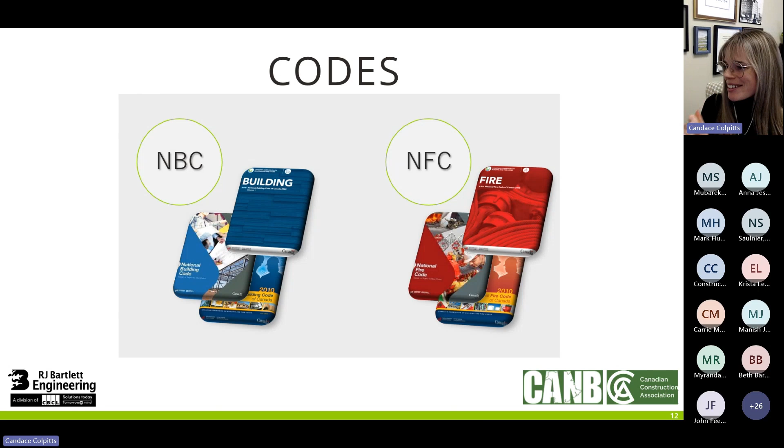Okay, so the NBC, National Building Code of Canada, that's mainly what I'll be focusing on today. If for some reason I get through the slides super quick, I'll be able to talk about some fire code stuff, but in general I'll stick to the building code. As for the evolution of the code, it's available in both English and French. It's adopted by each province in their own way. Some make amendments - New Brunswick we're just going to be adopting the 2020 with some amendments as well, specifically to accessibility stuff. The 2020 version, the most recent version that just came out a couple of years ago, is the 15th edition, where the NFC is the 11th edition. As a general rule, it cycles every 5 years.

Now the CCBFC, which is the Canadian Commission of Building and Fire Codes, who oversaw all these changes, is now called the Canadian Board for Harmonized Construction Codes, and is now overlooking these changes, keeping in mind that we want to harmonize with all the provinces across Canada. For public reviews, anybody can submit proposed changes for codes, and they're generally reviewed in the fall, and the standards that are developed as well can take that into consideration.

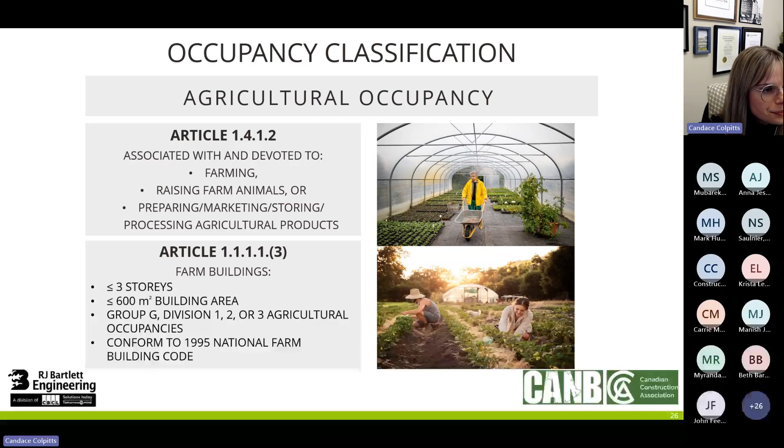Group G Division 1 is high hazard - things like feed mills, grain elevators, anywhere storing flammable and compressed gases and liquids, that would be high hazard agricultural. Group G Division 2, similar to your A2, is kind of your general category - anything that doesn't fit in the other categories, like animal exercise and training facilities, and packaging and processing of agriculture products and whatever's listed there.

Group G Division 3 is an agricultural occupancy where plants are grown in a building or part thereof that is primarily constructed of roofs and walls designed to transmit light - so greenhouses. And finally, Group G Division 4 are your farm buildings not intended for human occupancy - so grain bins, silos, and biomass facilities where people are only in there periodically for maintenance and not meant to be in there generally.

So if you meet those requirements, you can fall into Part 2 of Division B of the 2020 NBC. In general, the scope considers fire, structural, heating, and venting requirements of farm buildings. It covers the processes and operations carried out in the facility, and covers any risk of explosion or high flammability in those conditions.

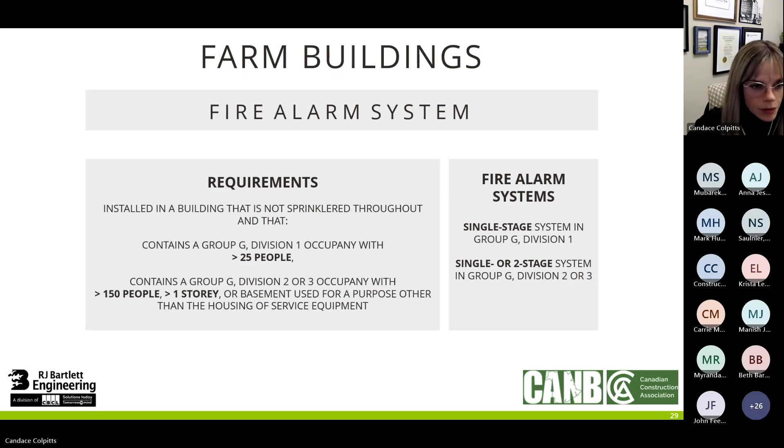So for fire alarm systems, if you have a high hazard agriculture occupancy with over 25 people, you need to have a fire alarm system, and this is if you're not sprinklered. Also, if you're a Group G Division 2 or 3 that has over 150 people, over 1 story, or has a basement for anything else other than service equipment, then you would need a fire alarm system. But if you're sprinklered, you need a fire alarm system anyway - this is for unsprinklered facilities. So in your high hazard, you would need a single stage fire alarm, and then a single or 2-stage for the other.

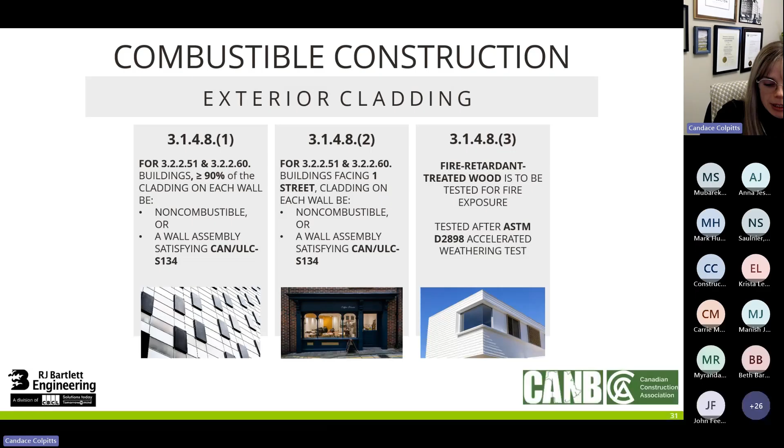Okay, so we're going to get into some general requirements. In combustible construction, there's been some changes to the exterior cladding requirements, and the main one is in sentence 3.1.4.8.2. So there is now, if you have buildings that meet 3.2.2.51 or 60, which is your Group C residential and Group D office buildings up to 6 stories combustible, and it's only facing one street, the cladding on each wall needs to be either non-combustible or a wall assembly meeting CAN ULC S134. So this has been clarified in the code in a couple of instances.

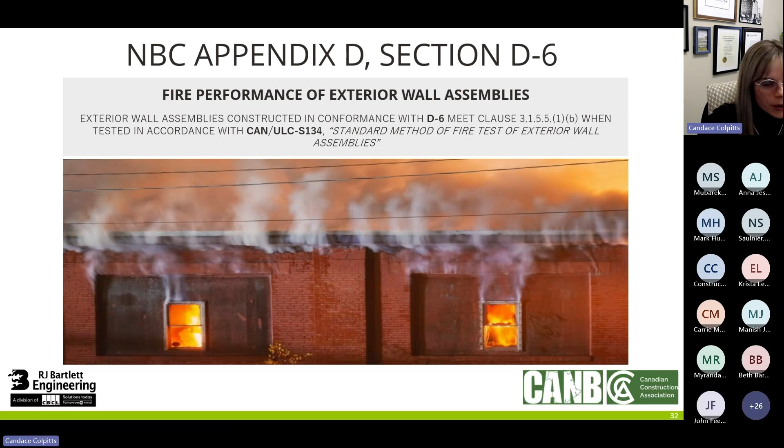Additionally, for that exterior cladding, you can meet Appendix D6, and if you meet that, then you would satisfy that requirement of being tested in accordance with CAN ULC S134. This hasn't changed, but we're just bringing this up again as a refresher. So here's your table D6.1.1 as for a couple of examples as to what assemblies could meet that requirement for your exterior wall.

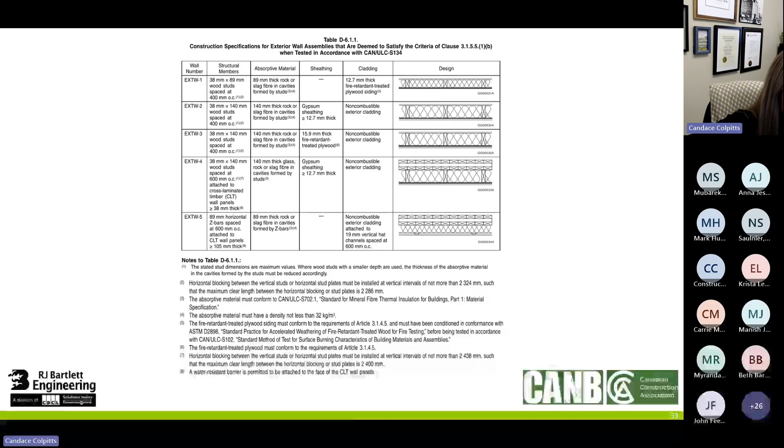Moving on to non-combustible construction, there is now a new element that is exempt as a minor combustible component. So wood blocking that's used for attaching windows in an exterior wall, that is now exempt. So you can have that in a non-combustible building even if it's combustible.

Another exciting change to the 2020 code - in non-combustible construction, you weren't really permitted to have a curtain wall. Each window had to be an individual unit separated with non-combustible construction. You had to have at least a meter of non-combustible construction separating each story, and you were limited to 40% of the aggregate exterior openings in each fire compartment. That hasn't been changed since 1965, so it was about time to change it. Now you're allowed to have combustible window sashes and frames in non-combustible construction, provided that they're non-contiguous between stories, so that they don't have direct contact. I don't believe there's an actual distance measurement - you don't need that 1 meter in between each story.

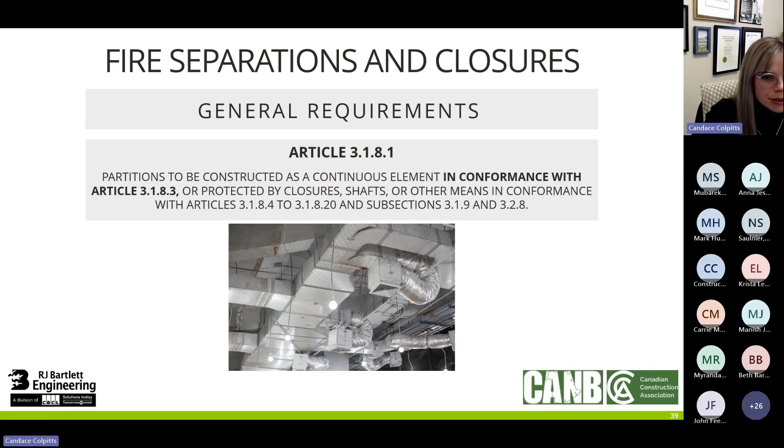Okay, moving on to fire separations. There has been some clarifications added for the requirements of fire separation continuity and fire stopping certain penetrations, and this also provides some consistency between Parts 3 and 9. I guess to note is in the 2015, the last version of the code, a lot of the requirements required you to have smoke tight joints, whereas now a lot of joints need to be fire stopped.

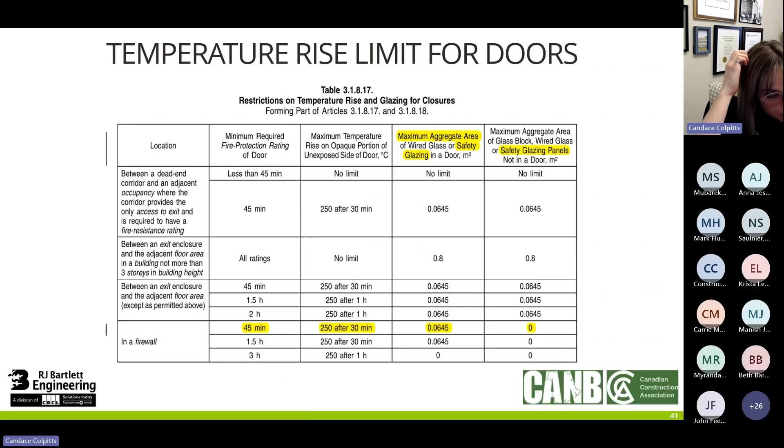So more on fire stopping, some additions. There's now restrictions as to what can be cast in place - only steel, ferrous, copper, concrete, or masonry penetrations can be cast in place. And also there's additions where the T rating, so when you have your fire stop that needs an FT rating, the T rating can be dropped for service equipment penetrations through a horizontal fire separation where they're contained within the fire separation. That's what sentences 6 and 7 of Article 3.1.9.1 are describing.

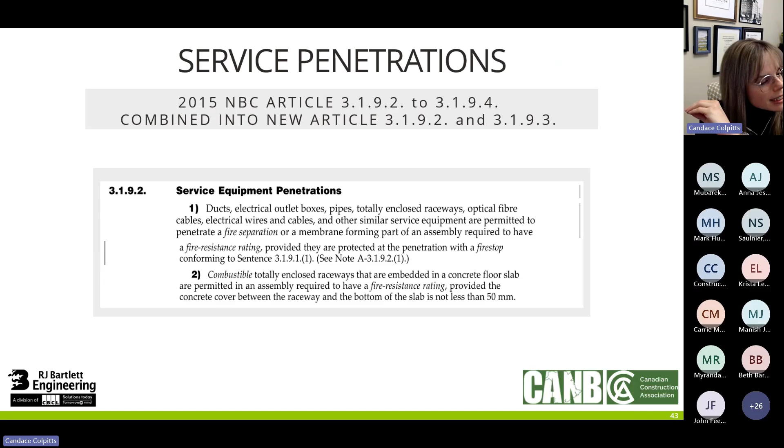So some other additions here - the service equipment, basically you need to fire stop instead of it needing to be incorporated at the time of testing. That wording's been changed. And there's been some additions for the permissions of combustible outlet boxes and some fire stopping as well.

In the 2015 code, combustible drain, waste, and vent piping needed to be fire stopped with an F rating and a 50 Pascal pressure differential. Now in the 2020 code, the 50 Pascal pressure differential only applies to 3+ stories, as seen in clause B.

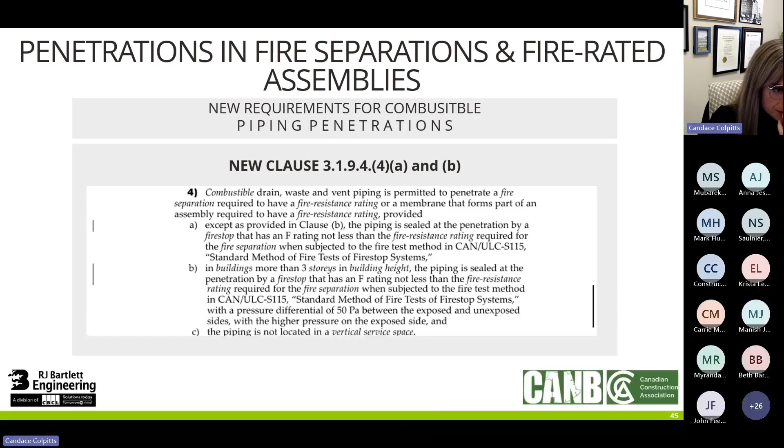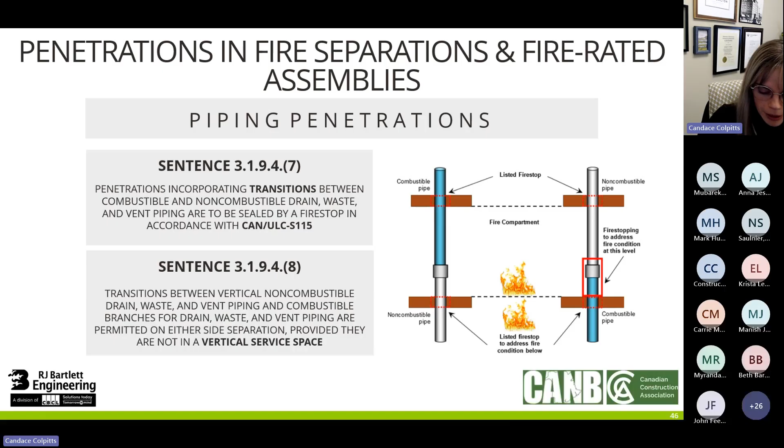Another addition is some added requirements for the transitions between combustible and non-combustible piping for drain, waste, and vent pipes. Your F rating for those fire stops needs to be not less than the fire resistance rating of the separation being penetrated.

Another addition to Part 3, similar to Part 9: before, if you had a room with combustible material like trash and recycling, you needed a 1-hour fire separation. Now in 2020, you're permitted to go down to 45 minutes if the floors can be 45 minutes in your building.

One of the more exciting additions to the 2020 NBC is encapsulated mass timber construction, EMTC. Research on this construction type has shown that when you encapsulate mass timber, it can perform the same as non-combustible in a lot of ways. This is used a lot in Europe and is successful there. We encapsulate the timber with a 50-minute encapsulation rating, and there are some permissions for what can be exposed.

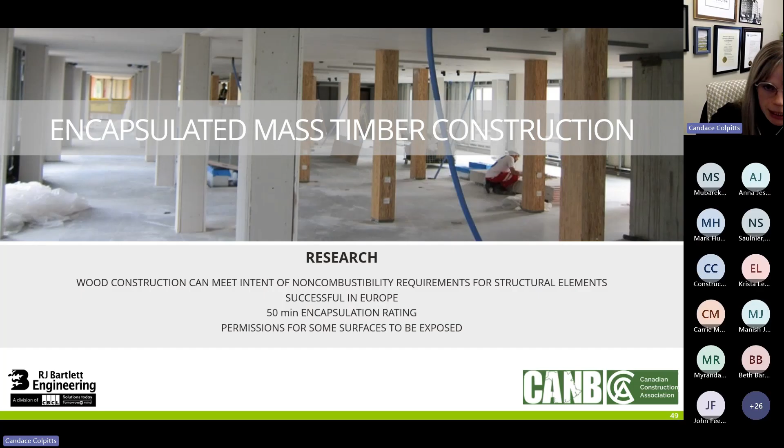So EMTC would include your beams, columns, arches, walls, floors, and roof assemblies. They need to be heavy solid mass. You're not permitted to have concealed spaces unless permitted by 3.1.6.3.4, such as if it's sprinklered or filled with fiber insulation. You need smooth, flat surfaces, with no sharp projections or thin sections.

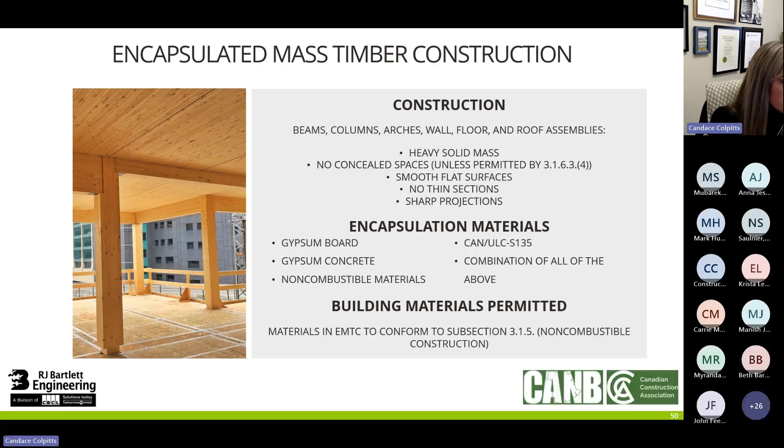Things used to encapsulate mass timber include gypsum board, gypsum concrete, non-combustible materials, or anything meeting CAN/ULC S135 - the standard test method for determination of combustibility parameters of building materials using oxygen consumption calorimeter or cone calorimeter, or a combination of the above. Building materials permitted in an EMTC building would be anything conforming to subsection 3.1.5, the same as for non-combustible construction.

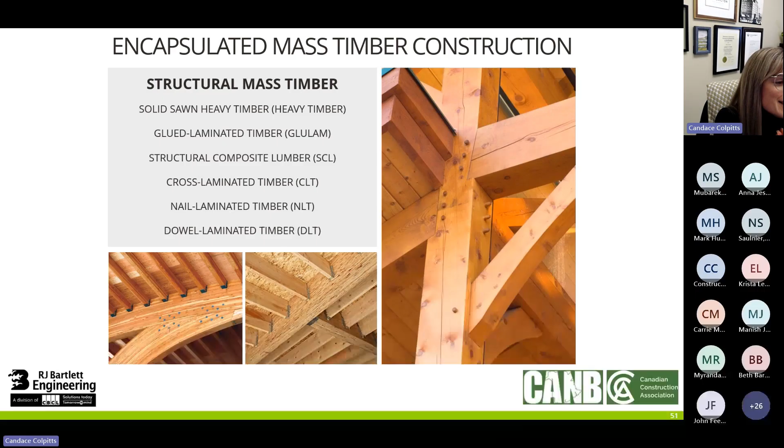Mass timber can include heavy timber, glulam, structural composite lumber, cross-laminated timber, nail laminated timber, and dowel laminated timber, to name a few.

Similar to your heavy timber requirements, there are certain dimensional requirements that you need to have for EMTC. Those are listed in 3.1.6.3.

Now for encapsulation ratings - some examples of what can achieve an encapsulation rating of 50 minutes: gypsum concrete that is at least 38 millimeters thick, or 2 layers of 1/2 inch type X gypsum, or anything in accordance with CAN/ULC S146.

You don't need a 50-minute encapsulation rating if less than 10% of the wall area within that suite or fire compartment has a flame spread rating of less than 150, provided exposed surfaces face the same direction. Also if less than 10% of your ceiling area within a suite has a flame spread rating of less than 150, or if less than 25% of your ceiling area with no mass timber walls has a flame spread rating of less than 75.

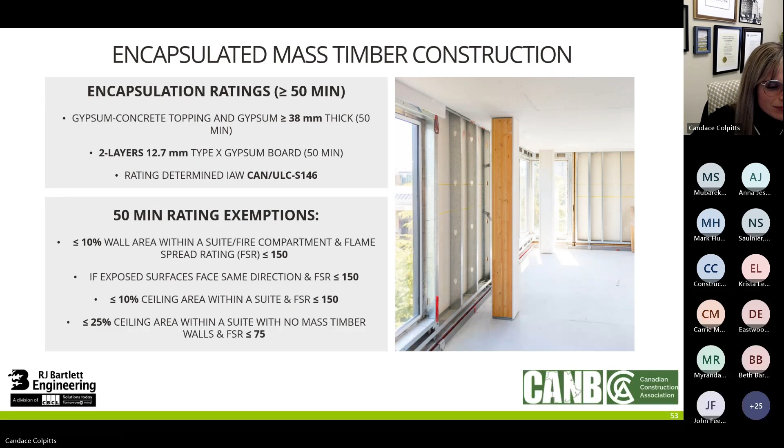More on EMTC: you're permitted to have combustible window sashes and frames if the windows are separated from other openings by non-combustible construction or EMTC. You have 1 meter of separation between stories, and the aggregate area of your openings is limited to 40%, similar to non-combustible construction beforehand. Unfortunately, no curtain walls yet.

When it comes to exterior cladding on an EMTC building, you need to be non-combustible, or you're permitted to be combustible in accordance with 3.1.6.9, which provides limits on aggregate area, separation between individual open portions, and flame spread rating limitations.

You're allowed up to 100% combustible cladding on the first story if it's within 15 meters of a fire department access route, or if CAN/ULC S134 mentioned in clause 3.1.5.5.1B is met. You can have up to 10% combustible cladding if 3.2.3.7 is met.

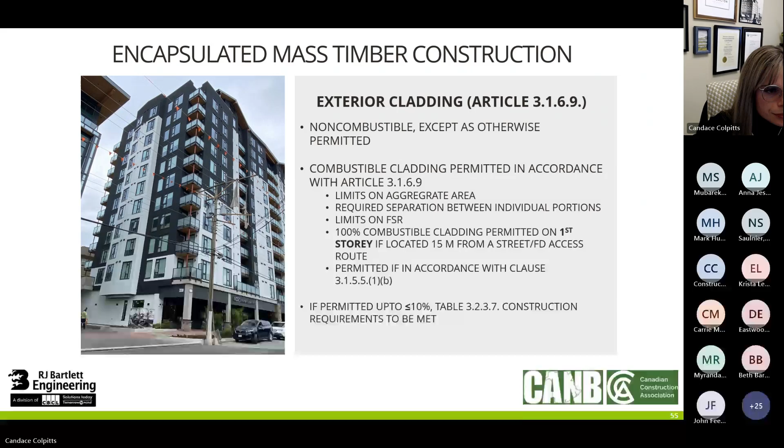Now for stairs - you're permitted to have combustible stairs in EMTC, even in exit stairwells, provided that the landings meet 3.1.6.3 and 3.1.6.4, which just provides some dimensional criteria. You can't have sharp edges or concealed spaces, and your exposed mass timber construction needs to be protected from adjacent spaces by gypsum, concrete, non-combustible construction, etc. You can also have combustible stairs permitted within a suite.

Now for interior finishes that are combustible: you're allowed up to 1 millimeter for walls and ceilings, or up to 25 millimeters on walls if your flame spread rating is less than 150. For ceilings, you can have up to 25 millimeters thick if your flame spread rating is less than 25, up to 10% of your ceiling if flame spread rating is less than 150, and up to 25 millimeters of fire retardant treated wood. Again, no foam plastics unless it's less than 1 millimeter thick.

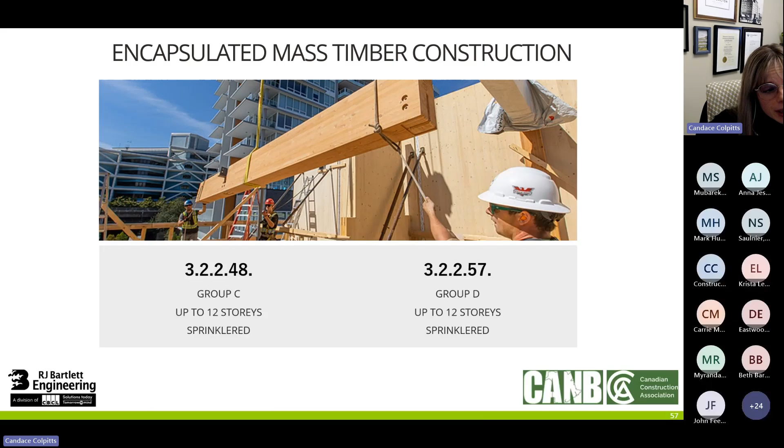Now there are 2 new construction articles that allow you to go up to 12 stories with EMTC, so that's pretty exciting, and I'll get into that in more detail in the next few slides.

For construction requirements, in the 2015 code, six-story combustible Group C and D buildings facing one street had to have at least 25% of their perimeter within 15 meters. Now you're permitted to have as low as 10% of your perimeter within 15 meters, provided the cladding conforms with 3.1.4.8.2, which basically means it needs to be non-combustible or meet CAN/ULC S134.

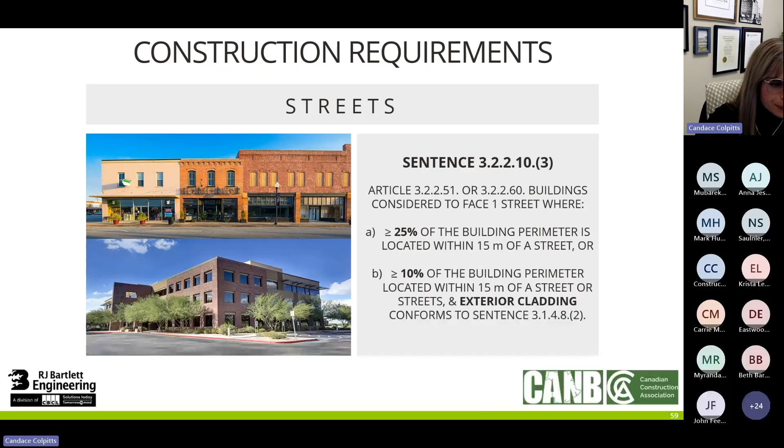Balconies on buildings in accordance with 3.2.2.48 and 57, which are your EMTC/non-combustible up to 12 stories, Group C or D, need to be either non-combustible or constructed in accordance with 3.1.6.3, which I believe covers the mass timber requirements.

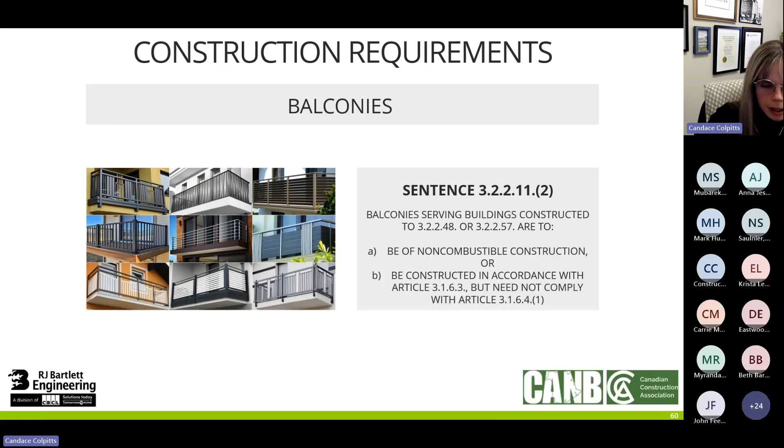Now there's some new mezzanine exemptions. The fire resistance rating of a mezzanine is now waived for gyms, pools, arenas, and rinks. In 2015, it only provided an exemption for roof ratings, but now it provides a mezzanine exemption.

Okay, so Article 3.2.2.48, this is your Group C building. It needs to be sprinklered. You can go up to 12 stories and up to 42 meters high, with EMTC or non-combustible construction. You're limited to a building area of 6,000 square meters. You need 2-hour floor assemblies and 1-hour mezzanines, and load-bearing walls, columns, arches, etc. need a fire resistance rating not less than that of the supported assembly.

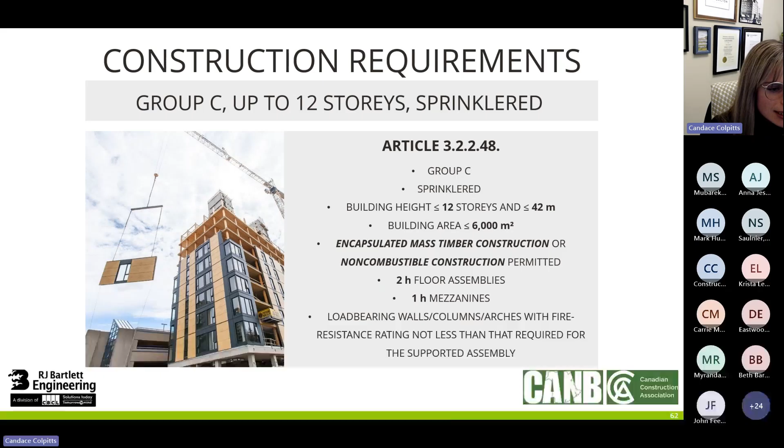Additionally, any floor assemblies within dwelling units that span more than 1 story need to be 1 hour, but they don't need to be constructed as fire separations.

You can have your Group A Division 2 or Group E mercantile occupancy, or storage garages, provided your assembly is located below the 4th story. Your mercantile can be located up to the 2nd story, and your storage garage up to the 4th story, so below the 5th story. That's what it says - it's interesting, I'll get into that a bit later, but the wording has changed a little. This is a new construction article, but there are other ones where the wording changed from 'up to the 4th story' to 'below the 5th story,' so it's just odd that they did that.

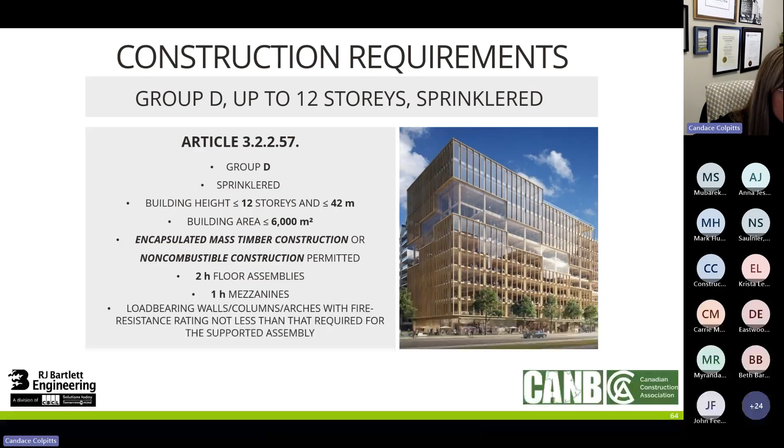Okay, so your next new construction article is 3.2.2.57, which is your Group D, up to 12 stories, sprinklered, up to 42 meters, up to 6,000 square meters in area, can be encapsulated mass timber or non-combustible, 2-hour floors, 1-hour mezzanine, and you can have assembly up to the 3rd story, mercantile up to the 2nd, and storage garages up to the 4th. Very similar to the Group C.

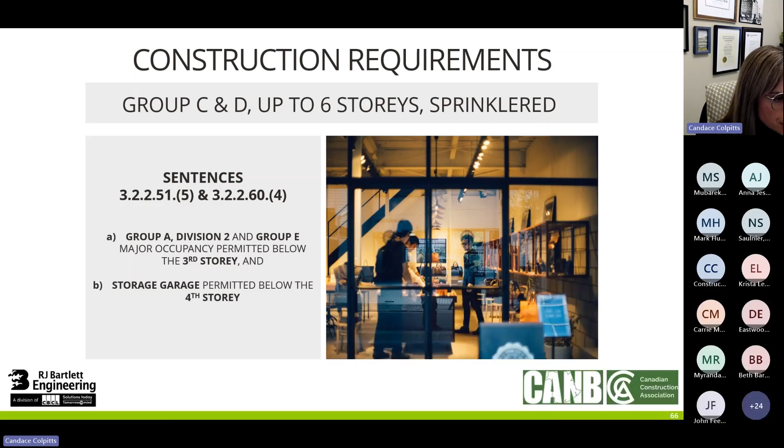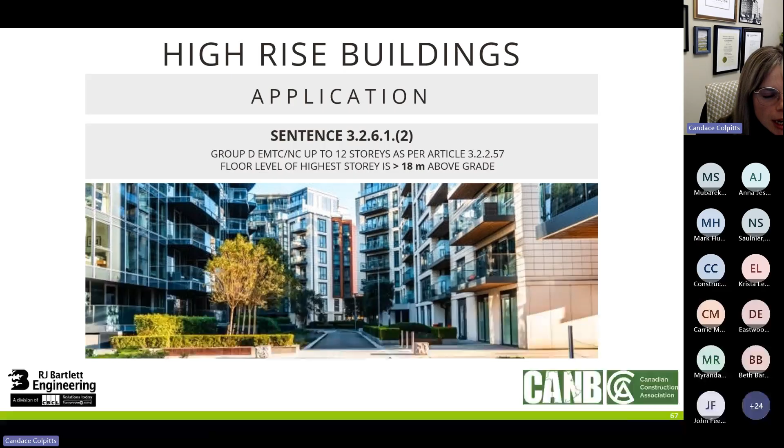Yeah, so this is where the wording was changed - these construction articles here for your Group C's and D's up to 6 stories, sprinklered. So Group A and E occupancy, Group A Division 2 and Group E occupancy, is permitted below the 3rd story, so up to the 2nd. And storage garages permitted up to the 3rd, below the 4th. It's noted that Group D occupancies that meet 3.2.2.57, that new construction article, are considered a high building if over 18 meters above grade.

Okay, now lastly for the construction stuff, when it comes to elevators, the 2015 code used to require electrical conductors to have 1-hour protection in accordance with CAN/ULC S101, but now you can have electrical conductors that conform to CAN/ULC S139 instead, provided your circuit integrity rating is at least an hour.

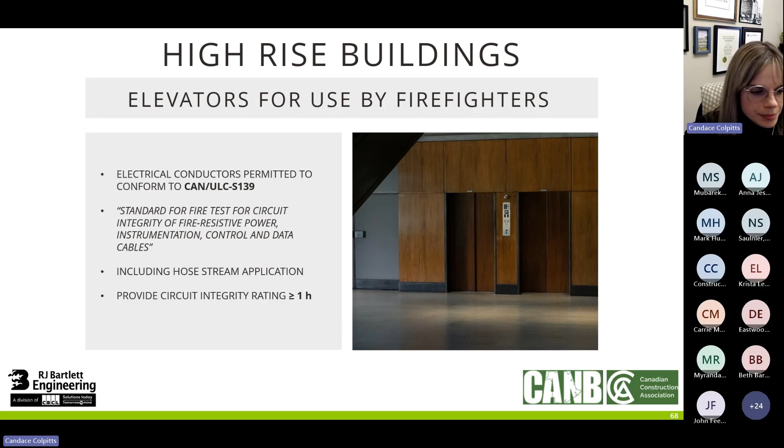Okay, now moving on to fire alarm and protection systems. Fire alarms are now not required in a residential occupancy that's not sprinklered if you have 4 suites or fewer that share a common means of egress, or if each suite has direct access to an exterior exit facility leading to grade.

So a new requirement that's been added to 2020 NBC is that heat tracing cables on standpipe risers and sprinkler lines now need electrical supervision and be transmitted to the fire department.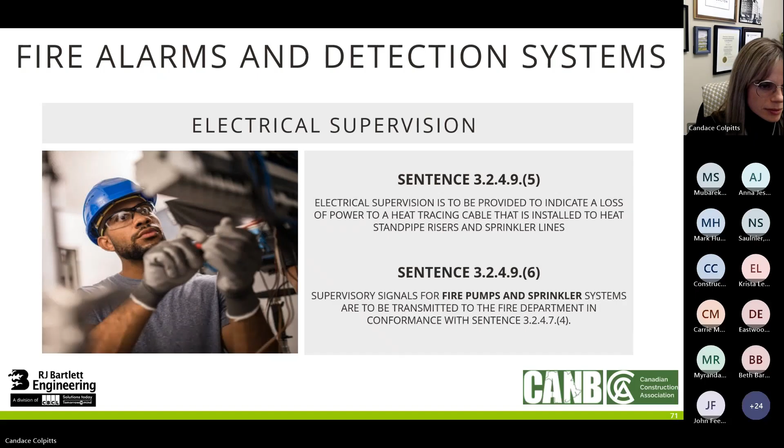Sentence 6 hasn't changed. Here's an interesting fact: research has shown that low frequency signals, between 470 and 570 hertz, are best at waking sleeping people. So what's been added is that a low frequency signal is now needed in residential occupancies for alarms in sleeping rooms. There was also a clarification added that the ambient noise level mentioned in sentence 7 needs to be determined when intervening doors are closed. That clarification wasn't there before.

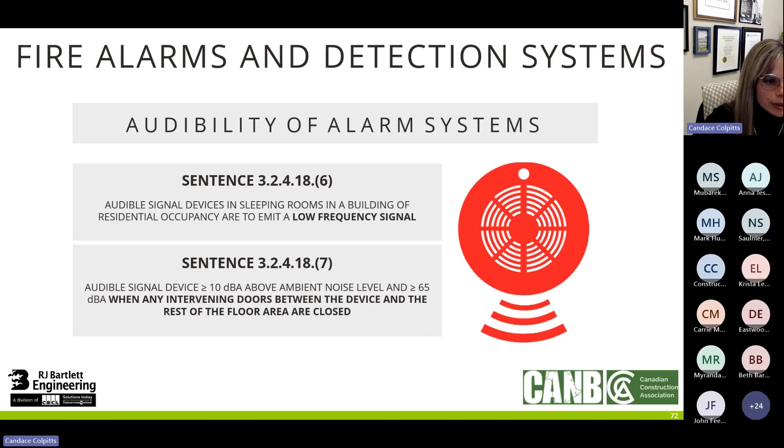In the 2015 NBC, it was only required that visible signals be included in buildings or portions being used by people with a hearing impairment, in assembly occupancies where performances could exceed 100 decibels, or in any floor area where ambient noise was over 87 decibels, or where there's hearing protection, an audiometric booth, or a sound insulating enclosure.

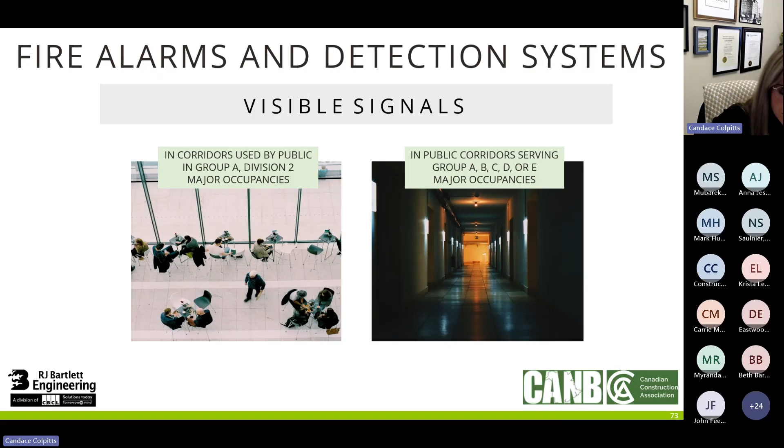That still remains, however there are additions now. In any corridor used by the public in Group A Division 2 occupancies, you need visible signals. Public corridors serving assembly, care, residential, office, or mercantile occupancies need visible signals, as well as at least 10% of suites in a hotel or motel, and in washrooms, except for washrooms within residential suites, care suites, or patient sleeping rooms.

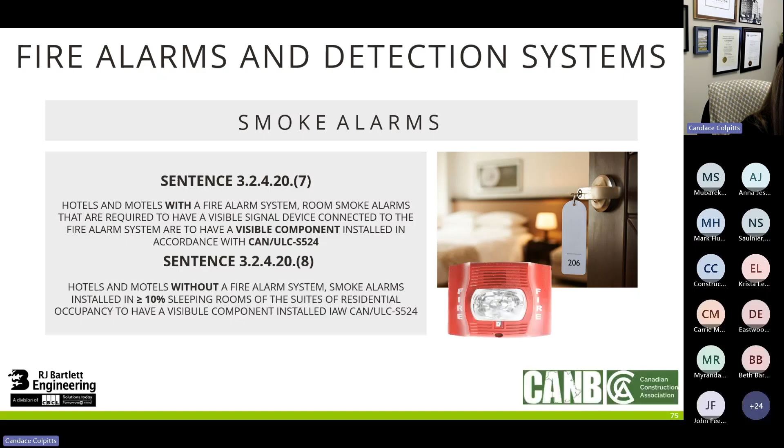So, like I said, in at least 10% of hotels and motels, that visible component needs to be on your smoke alarms, in accordance with CAN/ULC S524. And even without a fire alarm system, in at least 10% of sleeping rooms, your smoke alarms need to have a visible component.

Another interesting addition to the code is that in residential occupancies, when you're using smoke detectors in lieu of smoke alarms, there's now a new sound requirement. Before, there wasn't any decibel level specified, and now they specify that you need to be between 75 and 110 decibels.

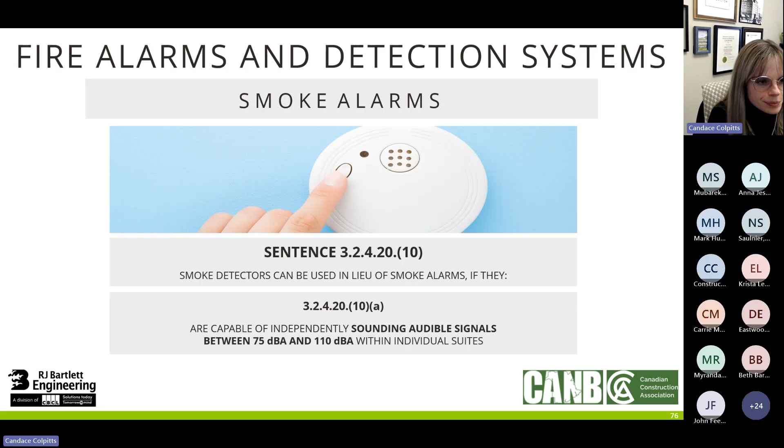So now 2020 allows residential occupancies with more than 2 dwelling units to have a sprinkler system in accordance with NFPA 13D. Some exceptions though: you can't have a unit above another, except you can have a secondary suite above one. All suites need to be vertically separated from one another by a 1 hour fire separation, and that fire separation needs to be continuous to the underside of the roof deck. Each unit needs its own water supply, and the sprinkler system design needs to be passive purge.

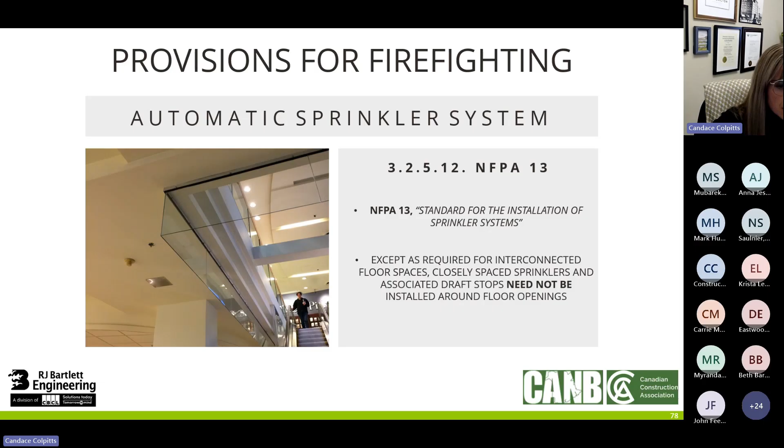Now there's some new lighting requirements. They added minimum lighting requirements where the entire length of escalators and moving walks need to be at least 100 lux at tread level. Any controls required by 3.8.2.6, like electrical switches, thermostats, faucets, door hardware, and intercom switches in barrier-free environments, need lighting of at least 100 lux. If visual information is provided at those controls, that info also needs lighting requirements, but at 200 lux, and any sign displaying this visual information as well, 200 lux.

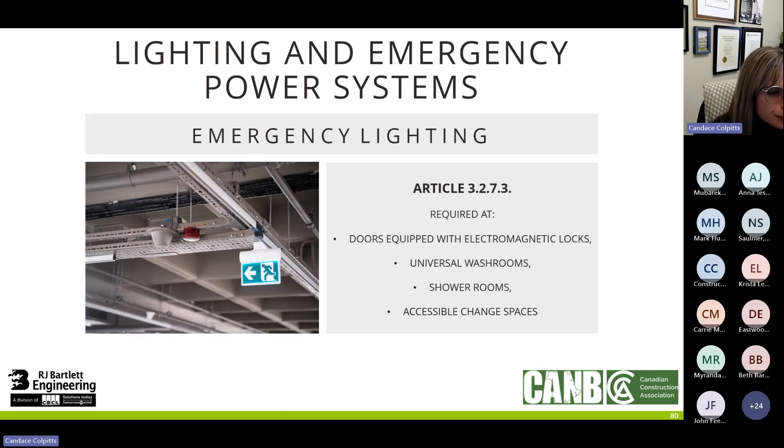Also, it's been added that emergency lighting is now required at doors with magnetic locks and also in universal washrooms, showers, and changing rooms. And there's a new exemption as well: emergency power supply for equipment for water for fire suppression doesn't need to be provided for sprinkler systems conforming to NFPA 13D.

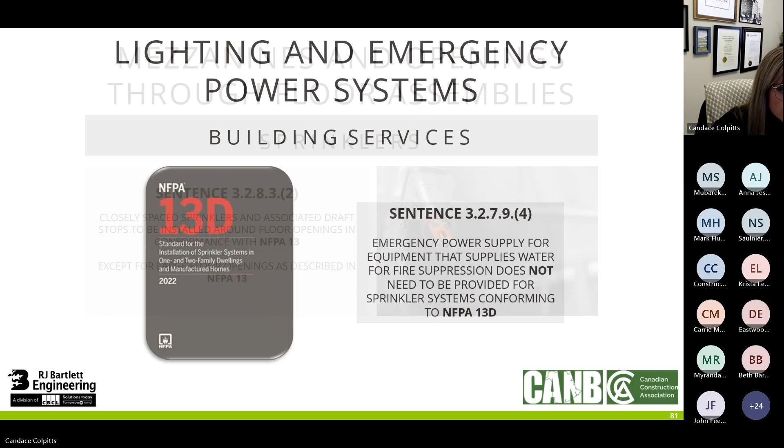So back to closely spaced sprinklers: in this edition, you need closely spaced sprinklers and draft stops if you're like an atrium and you follow those special requirements of interconnected floor spaces. But if you're a large opening, it's not needed. This is because the forces of a fire within that atrium would be so strong that it bypasses the draft stops and is essentially useless, apparently. That's why it was specified here.

And if you have a floor opening for an escalator or inclined walkway, then you need to have your closely spaced sprinklers and draft stops in accordance with NFPA 13 now, if you want to waive those special Subsection 3.2.8 requirements of interconnected floor spaces.

Okay, moving on to safety within floor areas, and about halfway done my time, and I'm at slide 84 of 158, so that's actually a really good sign.

In the section on headroom and protruding objects, in 2015 the headroom clearances were just exit head clearances, and you didn't need to consider protruding objects since there were no exceptions for them, but that's been added to the 2020 code. If you have any protruding element within 1980 millimeters of the floor, it can't project more than 100 millimeters horizontally into paths of travel, so that a cane's sweep can detect it. It's permitted to be over 100 millimeters if it's within 680 millimeters of the floor vertically, so the cane can still detect it.

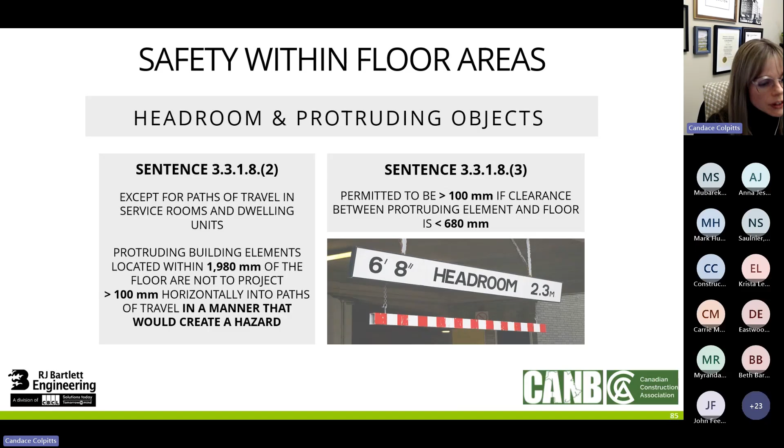So, doors and hardware requirements - this is an exciting one to keep note of. For doors in access to exits or public corridors, the minimum width has changed from 800 to 850 millimeters if there's only one door leaf, or if there's more than one leaf, the active leaf needs a width of at least 850 millimeters. Another addition is for door release hardware - before it was only specified that it needed to be below 1.2 meters of the floor, but now there's a minimum introduced. You need to be between 900 and 1,100 millimeters of the floor for your door hardware.

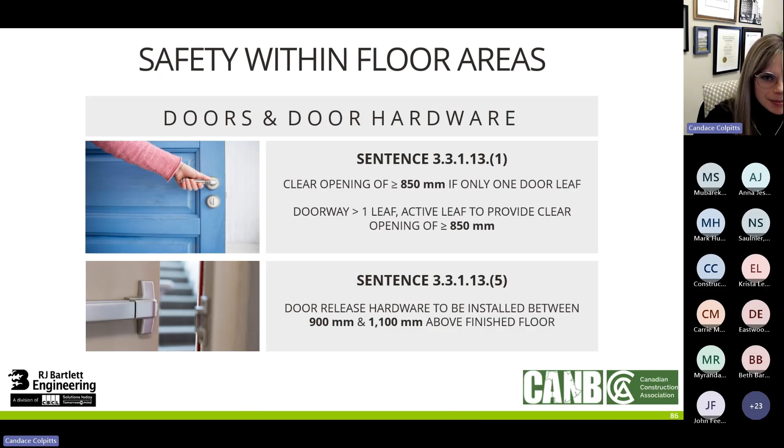Tactile walking surfaces - this is a new addition to the 2020 NBC. You need to have tactile walking surfaces in some instances: at the tops of flights of unenclosed stairs, or where you have drop-off edges with a change in elevation of at least 300 millimeters that doesn't have a guard. Things like pools and transit platforms are areas that wouldn't have a guard. They need to meet CSA B651, and you don't need to apply these tactile walking surfaces in service spaces, bleachers, on stages, industrial occupancies, within a dwelling unit, or for stairs serving no more than 2 dwelling units.

In assembly occupancies, you need to have panic hardware. There are some clarifications added to this door release mechanism - basically it needs to extend at least half the width of the door, which wasn't there before. Also, the height of that needs to be within 900 and 1,100 millimeters of the floor.

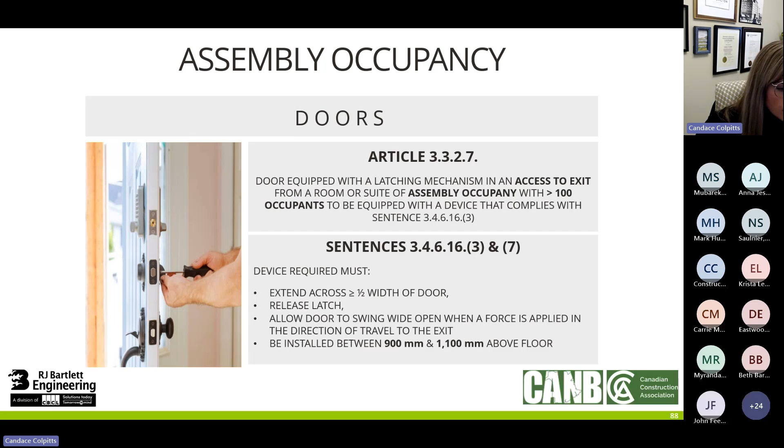Safety glazing, like I said before, was introduced in the temperature rise table earlier. There's an addition now that glazing in all fixed and operable panels of doors and windows in assembly occupancies needs to meet the safety glazing requirement. There are some exceptions: when the bottom of the glazing is at least 1525 millimeters above the floor, you don't need the safety glazing. Where the glazing opening in a door doesn't permit a sphere of over 75 millimeters through it, you don't need it either. And if you have a walking surface next to a window and it's over 915 millimeters away from that window, you don't need your safety glazing.

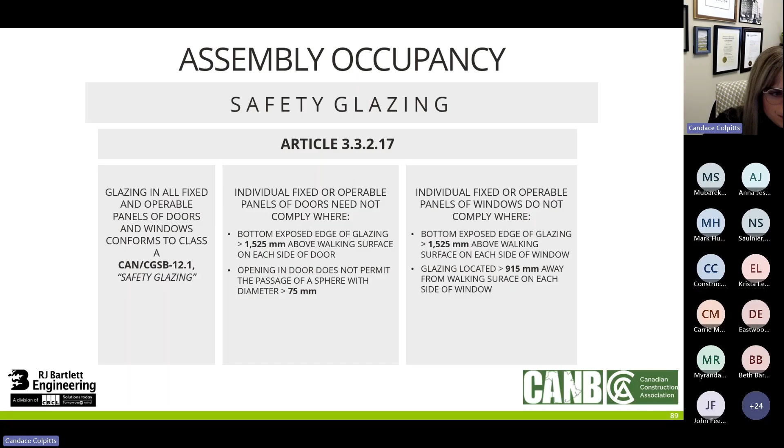Now, openable windows in residential occupancies - it's just been reworded. Now it needs to be released with a mechanism requiring tools or special knowledge, so the complete opposite of an exit or egress door. They also removed the window dimensional criteria of 380 millimeters - that's no longer mentioned. So you can have that mechanism or have a guard at the window, one of the two, for openable windows in residential occupancies.

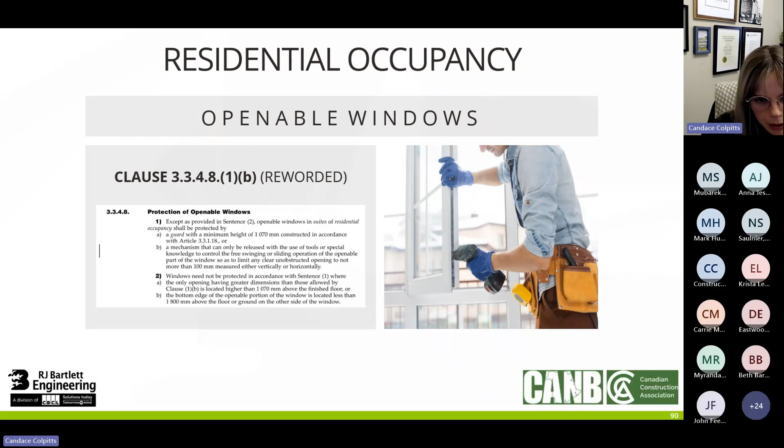Now moving on to exiting. Similar to access to exits and public corridors, the minimum exit door width has changed. That's in your assembly occupancies, detention, residential, business and personal services, group D, mercantile, and industrial - it used to be 800, now it's 850. I guess we're getting bigger as a population.

Now, tactile signage - this is new to 2020, just in an effort to make it more inclusive and accessible. You need to have tactile signage on the approach side of an exit, within exit stairs for emergency crossover access, at electromagnetic locking devices, and for floor numbering and identification of stair shafts.

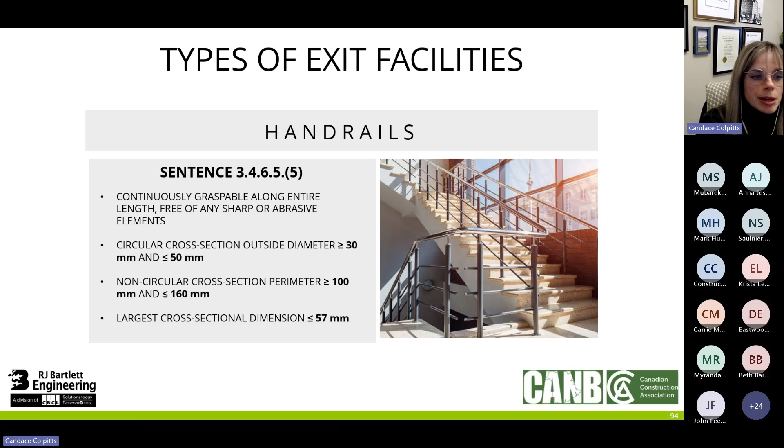Now, handrails - these dimensions have changed as well. The circular cross section needs to be within 30 and 50 millimeters, whereas before that upper limit was 43, so that's increased. Same with the non-circular cross-section perimeter - that upper limit of 160 used to be 125 millimeters. And the largest cross-sectional dimension is now a max of 57, but it used to be a max of 45. So our hands are getting bigger too, apparently.

Now, ramp slopes. These have changed a little bit too. In 2015, you needed a max slope of 1 in 10 in assembly, care, treatment, detention, or residential occupancies. That was 1 in 6 in industrial, 1 in 8 in all other occupancies, and 1 in 10 for exterior ramps. Whereas now it's shortened: your max permitted slope needs to be uniform at 1 in 12, with industrial occupancies at 1 in 6 interior and 1 in 10 for exterior.

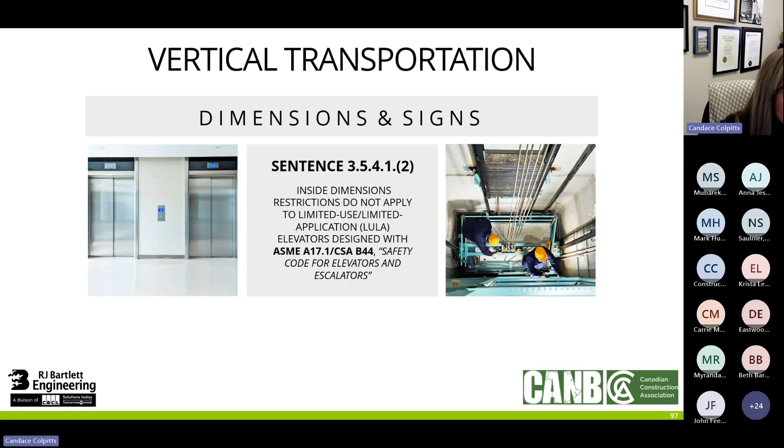Now, there's an added exemption for limited use elevators. Now they don't need to accommodate a stretcher. It was just found that limited use elevators weren't necessary for those activities. So those are designed with ASME A17.1/CSA B44.

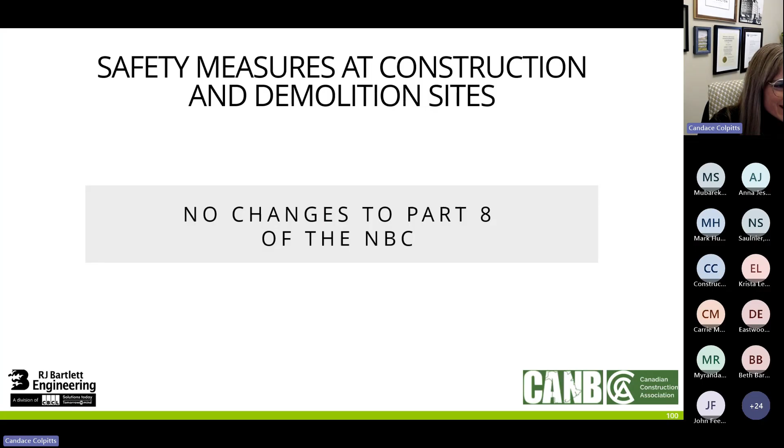Okay, so that was part 3. We're getting into part 8, and this is a quick one because there are no changes to part 8. So safety measures at construction and demolition sites - just keep on doing what you're doing.

Now, part 9. I'm looking at the time, and we're going to be able to do part 9.

So, open risers - there's some new added exceptions for open risers. You're permitted to have open risers in a part 9 building for interior and exterior stairs that serve a single dwelling unit or a house with a secondary suite, fire escape stairs just for maintenance or service rooms, and industrial occupancies. But storage garages, you can't have open risers.

Now, there's a couple of additions to guards. The 2020 NBC for Part 9 removed part of sentence 1, where it used to say the adjacent surface within 1.2 meters of the walking surface has a slope of more than 1 in 2. That's no longer there. So basically, if you have an elevation difference of more than 600 millimeters, that's where you need to have a guard. And clause 4B...

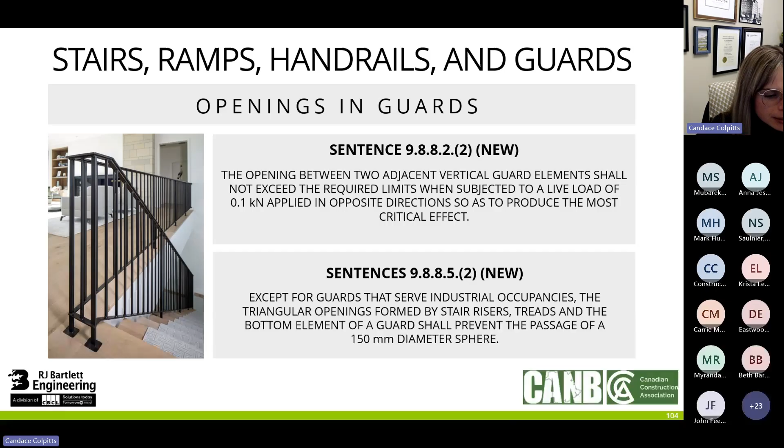So home type care occupancies - I mentioned almost an hour ago here that home type care occupancies were to follow part 9, so we're going to get into that now. In order to conform with part 9 as a home type care occupancy, you need to have 10 sleeping accommodations or fewer, because if you're over that, you need to go into part 3. So 10 or less, you comply with the detached houses requirement in part 9, and you can sprinkler in accordance with NFPA 13D, and you need to have at least a 30-minute water supply for that system.

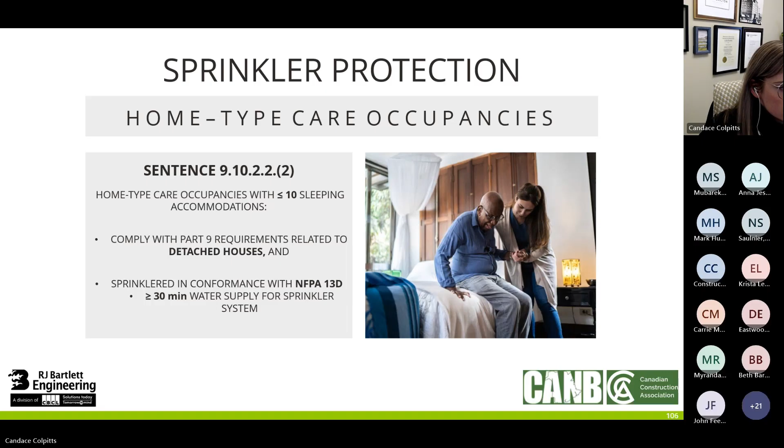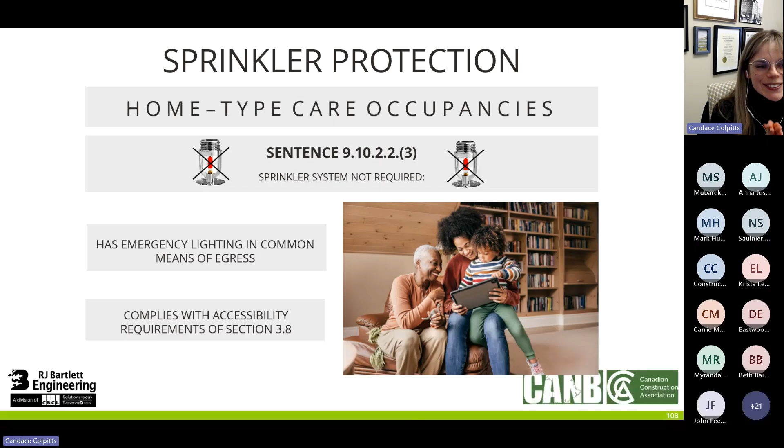So, exemptions to where you don't need a sprinkler system. If you are a home type care occupancy that is 1 story, with no basement or mezzanine, and your sleeping accommodations are for 4 people or fewer, and that floor area is served by at least 2 barrier-free means of egress, plus some smoke alarm requirements, emergency lighting in your common means of egress, and compliance with section 3.8 accessibility requirements, then you don't need a sprinkler system. So a lot of details to consider.

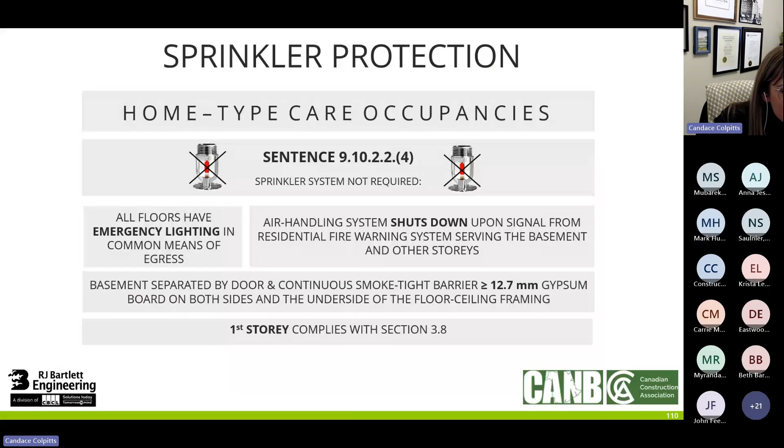Another example: if you want to go up to 2 stories, you can have up to 4 residents, but only on the first story, and that story needs at least 2 barrier-free means of egress, similar smoke alarm requirements, and emergency lighting in common means of egress. Your air handling system needs to shut down from the signal from your residential fire warning system. The first story needs to comply with the accessibility requirements of 3.8, and any basement must be separated by a door and continuous smoke tight barrier with at least 12.7 millimeters half-inch gypsum board on both sides and the underside of the floor ceiling framing. So that's what you need to do to get away from those sprinkler requirements. And like I said earlier, if you have 11 people in your home type care occupancy, you're pushed into a Group B Division 3 care occupancy.

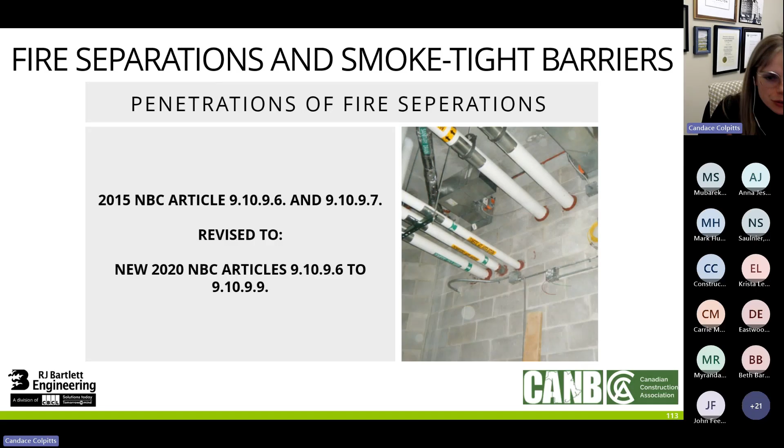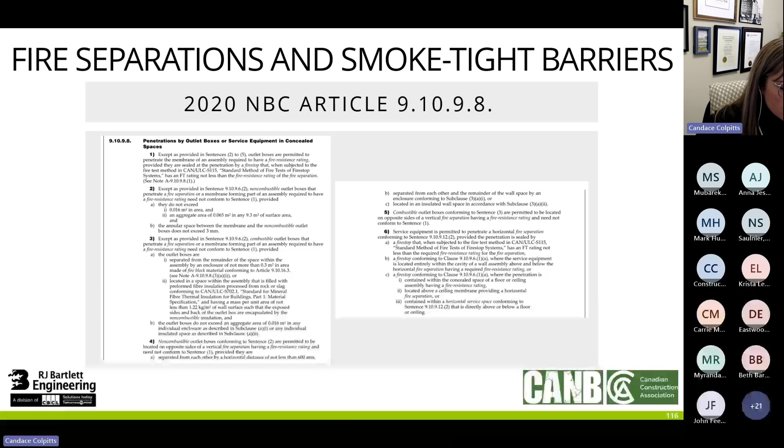There's been some changes to Articles 9.10.9.6 and 9.10.9.7, revised into more articles, basically restructured a little bit. Piping penetrations were brought into their own article, 9.10.9.7, which aligns with part 3. For outlet boxes and service equipment, there's now a new minimum offset distance between outlets on either side of a fire separation, which wasn't specified before, and it's 600 millimeters. Your outlet area is quantified there, same with your annular space in an outlet box, and it also clarifies some non-combustible outlet box exceptions. Again, this is one that's restructured.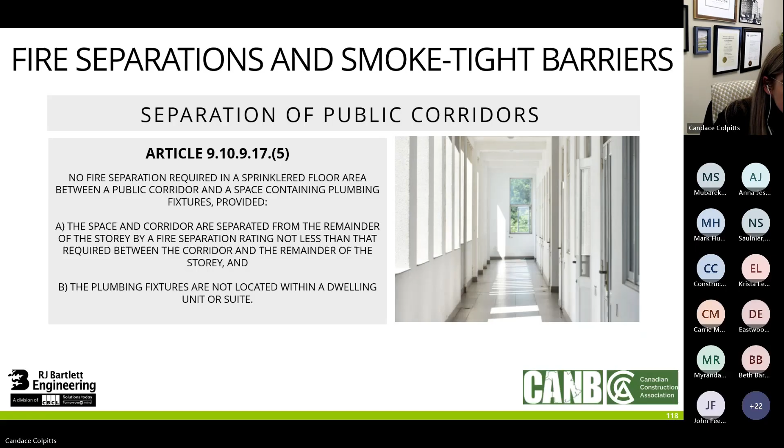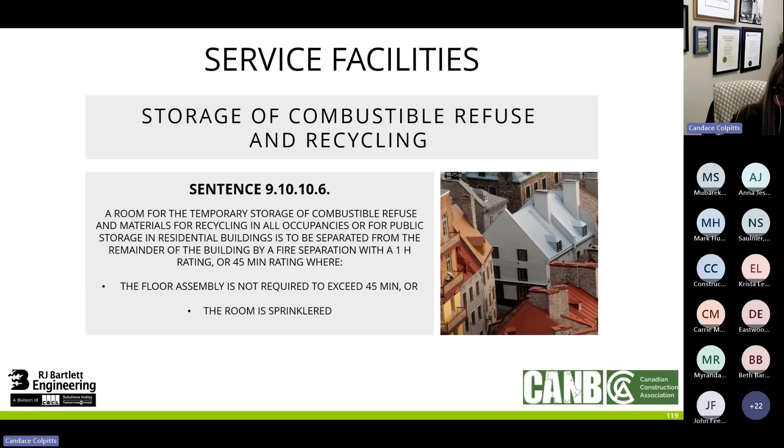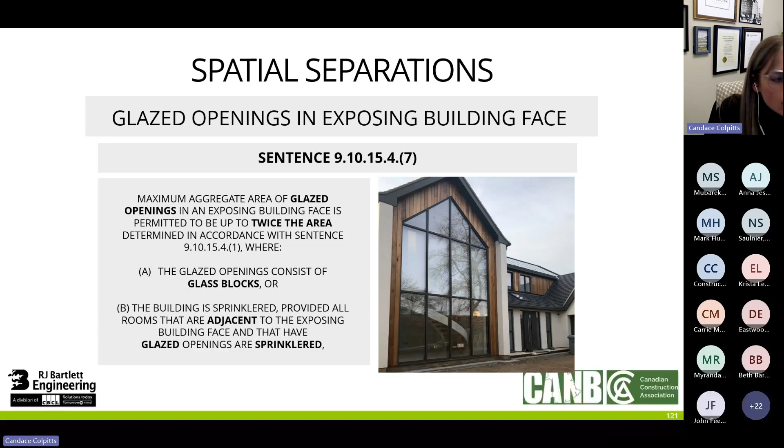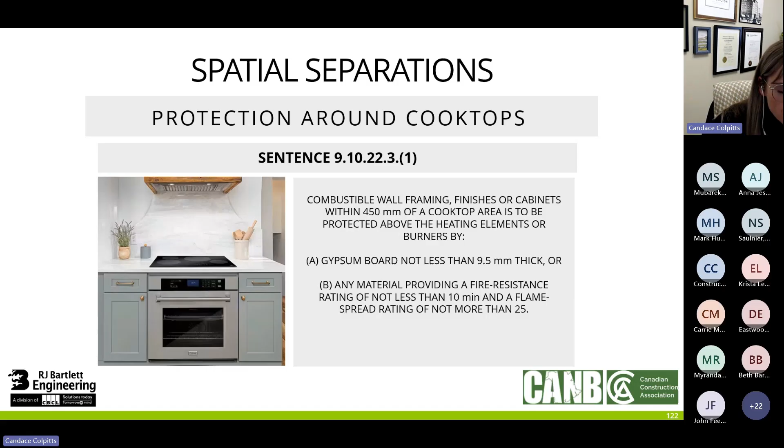Okay, so I'm looking at the time. I have a few slides at the end that are specific to some proposed changes to the 2025 National Building Code that I really want to share with you guys. What I'm going to do is go through them quickly in a way that reminds me of some of the major changes to the National Fire Code. So let's just zip through them.

A lot of these are just adding some requirements around home type care and encapsulated mass timber construction where those weren't mentioned before, so there's a lot that's just incorporating those. Another thing is that Section 2.8 of the National Fire Code is now restructured in a way that all of the fire safety planning requirements are all in one area. They used to be peppered throughout the code, but now they're in one spot, so that's really nice. Also, farm buildings - there's a new section 2.14 that just kind of goes over some farm requirements.

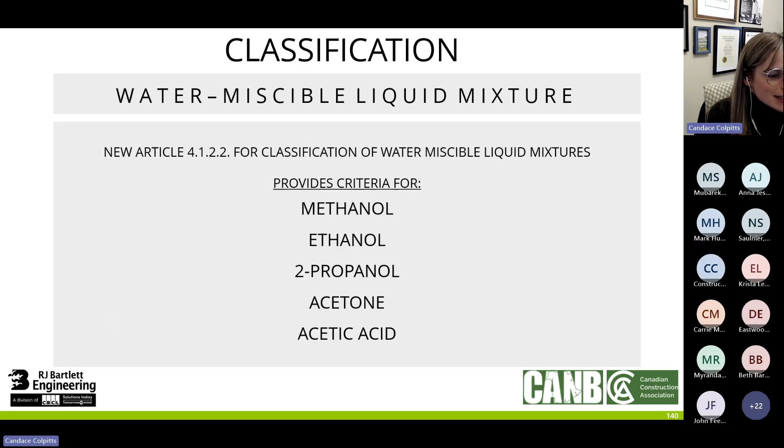Another exciting change is that before, flammable and combustible liquids - there's different tiers of hazard for combustible and flammable liquids - those used to be determined solely on your flash point. But now for these water miscible liquid mixtures that are listed, so methanol, ethanol, 2-propanol, acetone, and acetic acid, it's now defined by certain percentages. So for example, methanol - if you have a water methanol mixture with less than 20% methanol, it's no longer considered a flammable liquid, so it's combustible, and you'd be exempt from certain requirements there. So that's pretty exciting.

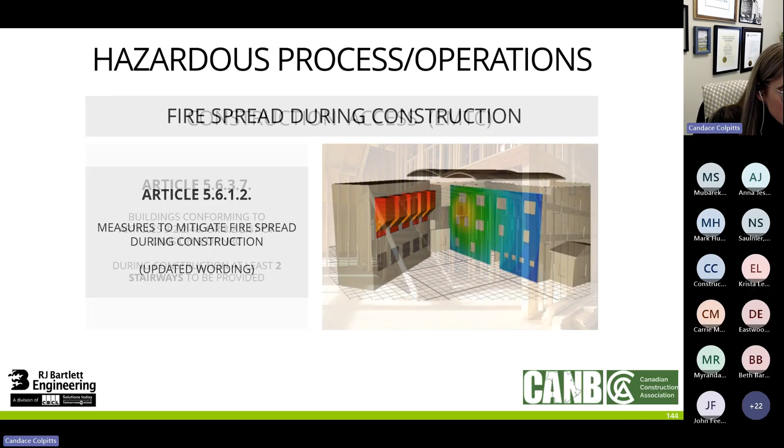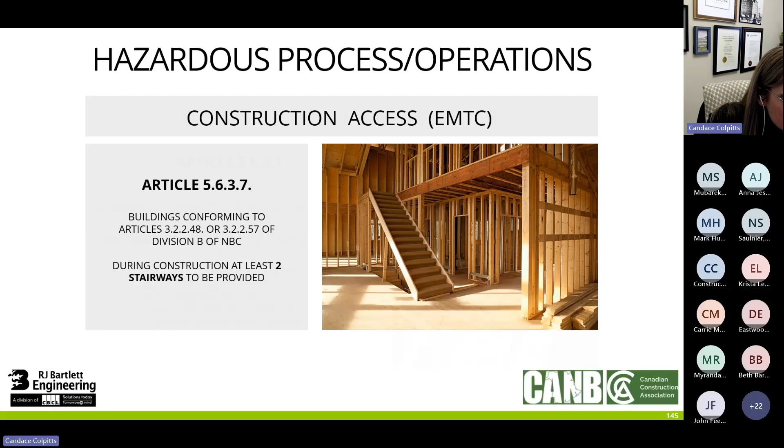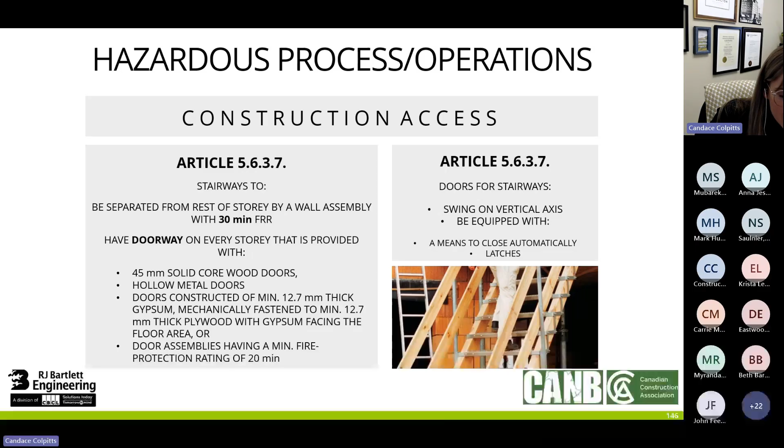Okay, I should probably mention this one though. When you have a building under construction using EMTC, you need to have at least 2 stairways provided during construction for buildings that conform to 3.2.2.48 and 3.2.2.57 - those are the new ones, up to 12 stories, EMTC groups C and D. Those have a few requirements that are kind of extensive: they need to be separated with a 30-minute fire resistance rating from the rest of the floor assembly. The doors need to be provided with 45 mm solid core wood doors, hollow metal doors, or doors with half-inch gypsum mechanically fastened, or a minimum of 20-minute fire protected doors, and they need to swing on a vertical axis and close automatically. So quite extensive for a construction site.

Yeah, so those are the major ones. Okay, so now the 2025 proposed changes to the NBC.

The 2020 building code requires that the protection of foam plastics and insulation need to have things like gypsum, or lath and plaster, masonry, concrete, or any thermal barrier meeting CAN/ULC-S124 covering these foam plastics. But there's going to be a new standard introduced, potentially CAN/ULC-S145, the standard method of test for evaluation of protective coverings for foamed plastic insulation. So if you have this 10-minute coating rating, you can protect foamed plastics this way instead of those other gypsum, lath and plaster, masonry coatings. This would permit things like intumescent coatings, like DC315 for example, to be permitted by the building code.

And another one - elevator car dimensions. Right now, at least one elevator on each story needs to have dimensions to accommodate a stretcher, but there's going to be a clarification potentially where elevator machine room penthouses aren't considered stories for the purposes of this elevator car dimension requirement. So if there's an elevator that's just meant for servicing and going to this elevator machine room penthouse, for example, it doesn't need to meet those stretcher requirements.

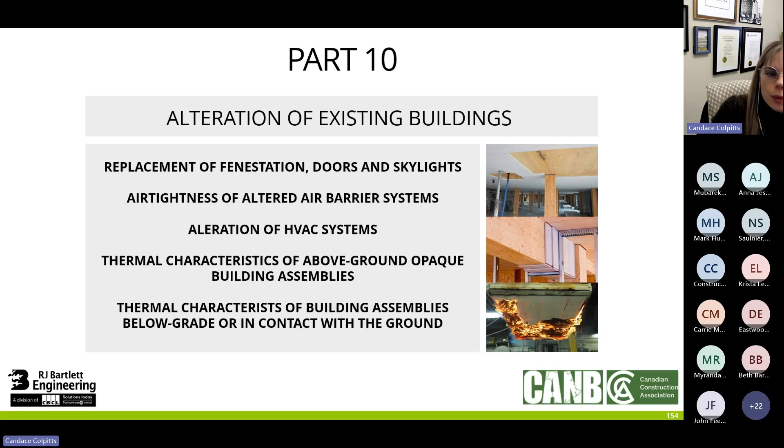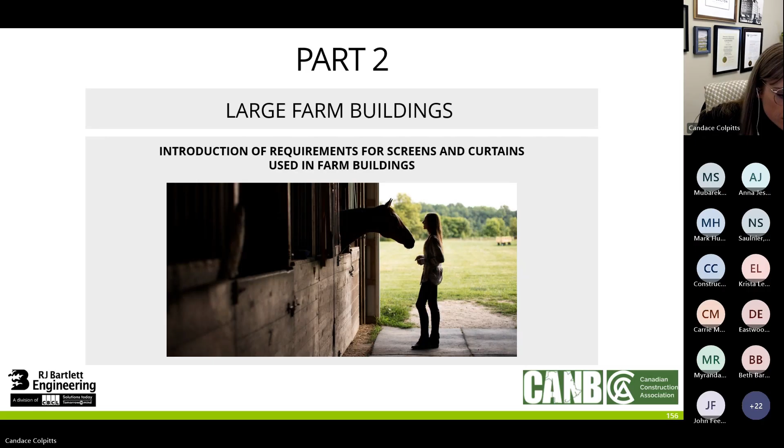A couple new proposed changes for the NFC in 2025: one is a potential introduction of flame testing requirements for screens and curtains used in farm buildings, and also some limitations for the quantities of dangerous goods and compressed gases in laboratories.

Okay, I can't believe I got through all the slides with 15 minutes to go. What I've done is added my email up on the screen if you have a question that I can't answer, but I will do my very best to answer as many questions as I can today.

I am looking now at questions. Can you clarify what has changed from the 2015 to the 2020 for combustible cladding on exterior walls required to meet S134?

Combustible cladding on exterior walls, let me try to find that slide here. S134, am I on the right slide?